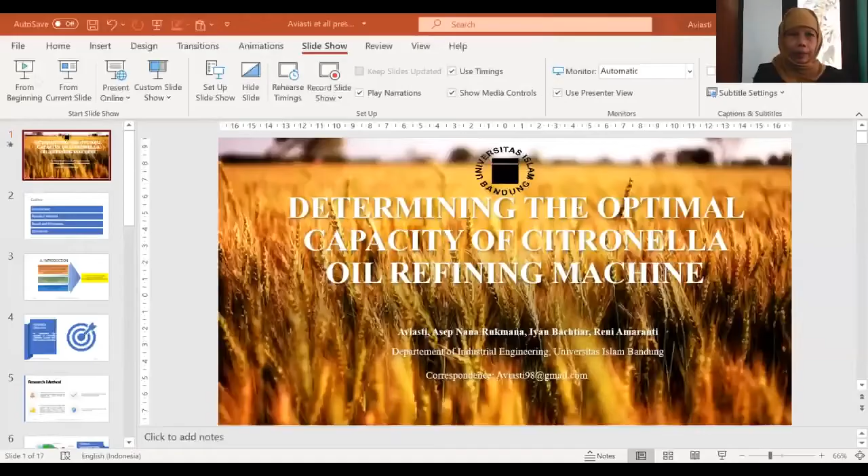I will try to present the result of my research entitled Determining the Optimal Capacity of Citronella Oil Refining Machine.

Outline: first, introduction; second, research method; third, result and discussion; and fourth, conclusion.

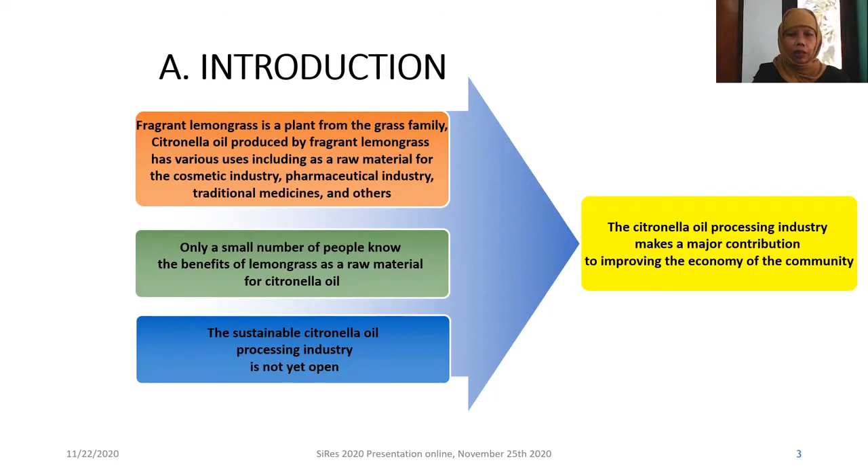Introduction: Fragrant lemongrass is a plant from the grass family. Citronella oil produced by fragrant lemongrass has various uses, including as a raw material for the cosmetic industry, pharmaceutical industry, traditional medicine, and others. Only a small number of people know the benefit of lemongrass as a raw material for citronella oil. The sustainable citronella oil processing industry is not yet open. Based on this background, I think the citronella oil processing industry makes a major contribution to improving the economy of the community.

Research objective: to determine the capacity of the citronella distillation machine with high quantity and quality. Research method: observation and interview to collect data on fragrant lemongrass distillation, or citronella oil distillation, and the capacity of the citronella oil distillation machine. Descriptive analysis was used to determine the capacity of the citronella oil distillation machine. The survey was carried out from December 2019 to February 2020 in Gunung Halu village.

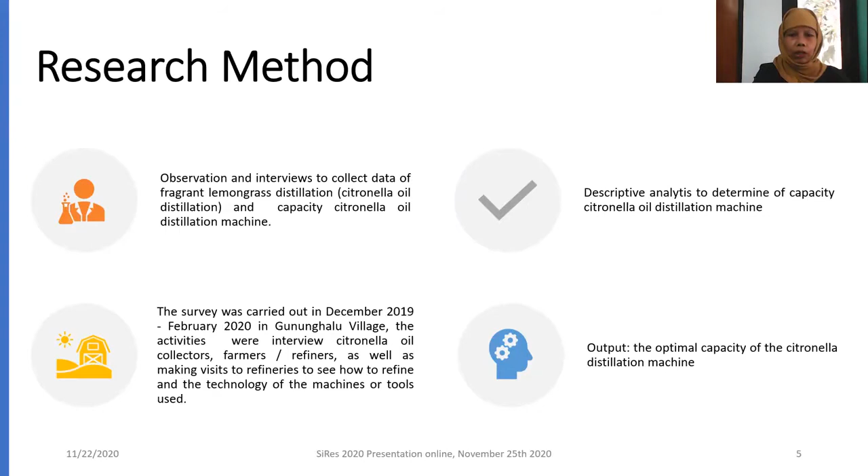The activities included interviewing citronella oil collectors, farmers, and refiners, as well as making visits to refiners to see how they refine and the technology of the machines or tools used. Output: the optimal capacity of the citronella distillation machine.

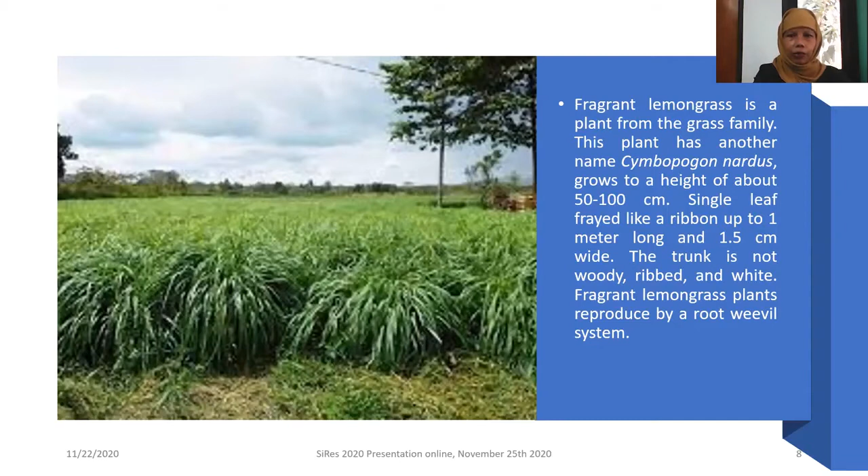Result and discussion. This is the fragrant lemongrass plant. Fragrant lemongrass is a plant from the grass family, also known as Cymbopogon nardus, growing to a height of about 50 to 100 centimeters. Its single leaf is shaped like a ribbon, up to 1 meter long and 1.5 centimeters wide. The trunk is not woody, is ribbed and white. The fragrant lemongrass plant reproduces by a rhizome system.

B: In Sindang Jaya Village, Gunung Halu District, namely Babakan Garut Village, RT 3 RW 6, there are 2 lemongrass distillers with an area of 25 hectares of citronella. The capacity of the refining kettle is 300 kg; from 1 ton of lemongrass leaf they produce 7 kg of fragrant lemongrass oil. The next survey was in Sindang Jaya Village, Sindang Village, where we met one lemongrass distiller, Mr. Sudrajat, who has his own refinery with a refining capacity of 600 kg, producing about 3.5 kg of fragrant lemongrass oil.

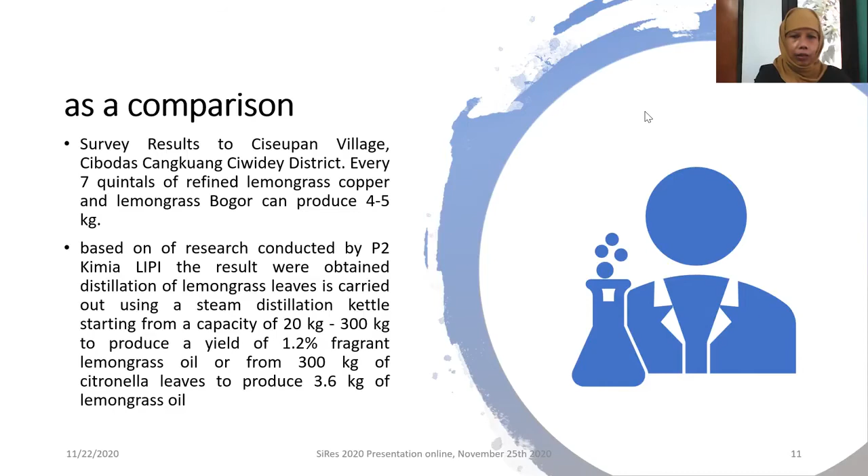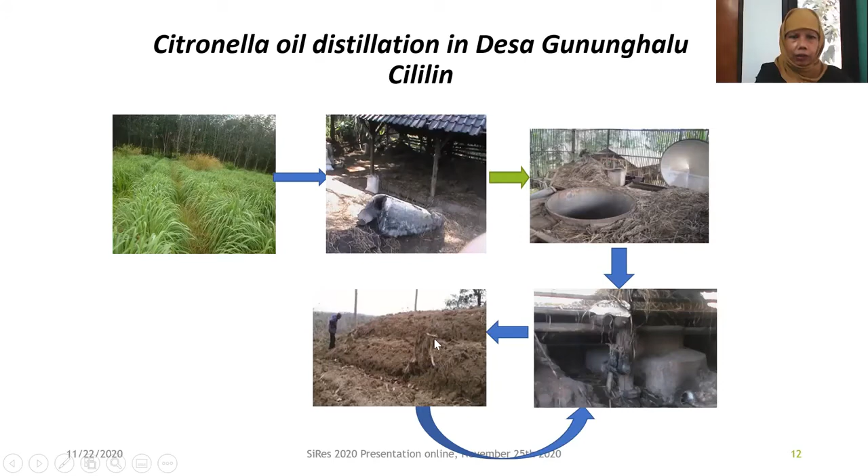This is citronella oil distillation in Desa Gunung Halu Cililin, where they have a conventional machine for distillation. This is the fragrant lemongrass plant, and this is the machine or boiler used for distillation, and this is the waste from citronella oil distillation.

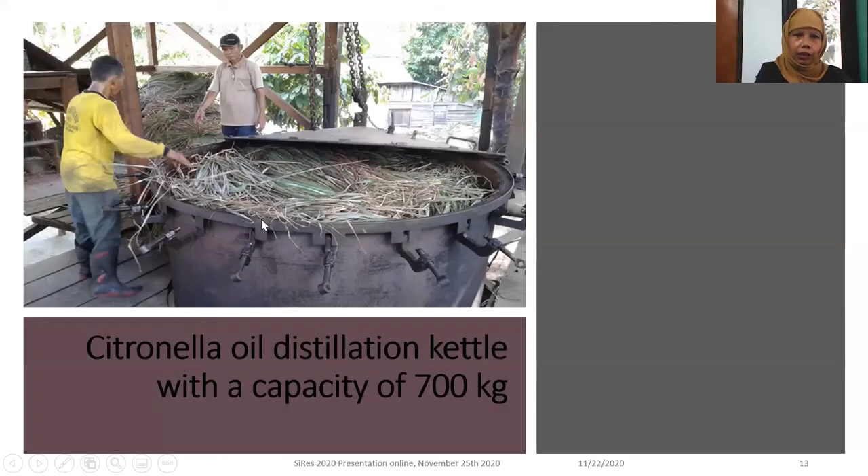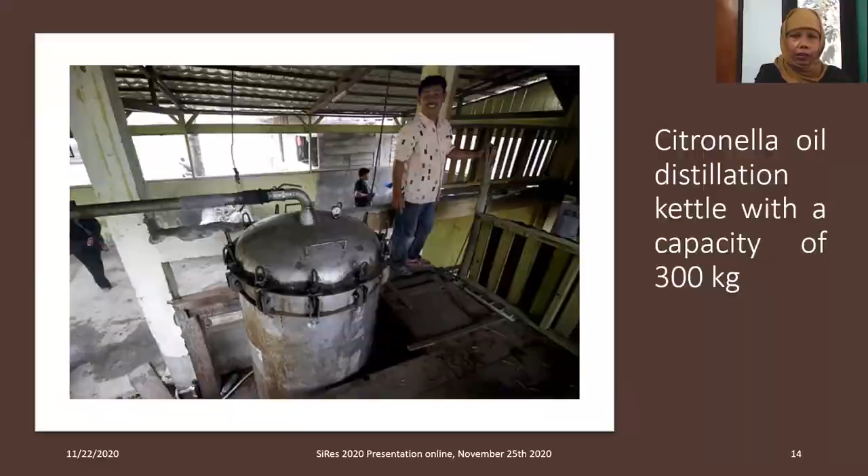Based on the analysis and discussion, the conclusion of this research is that the right strategy to improve the performance of the citronella oil distillation industry is to use a lemongrass refining kettle with a capacity of 300 kg or 700 kg of lemongrass leaves.